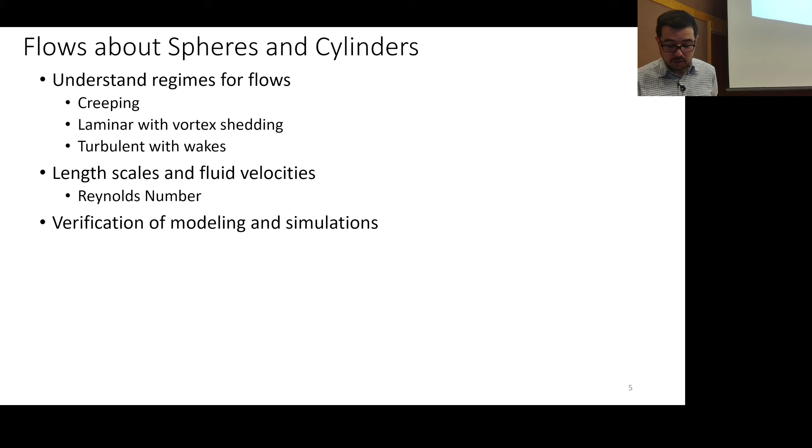We've talked about the drag coefficient before. If you've got some kind of 2D or 3D projection, you can think about either the frontal cross-sectional area that's being exposed, or you can think of the wetted area, as with an airfoil, so span times length, or a surfboard, where you've got this big area in contact with the water - that's your wetted area. You've got to be careful when you calculate the drag force what the table you're looking at is essentially saying the area of interest might be.

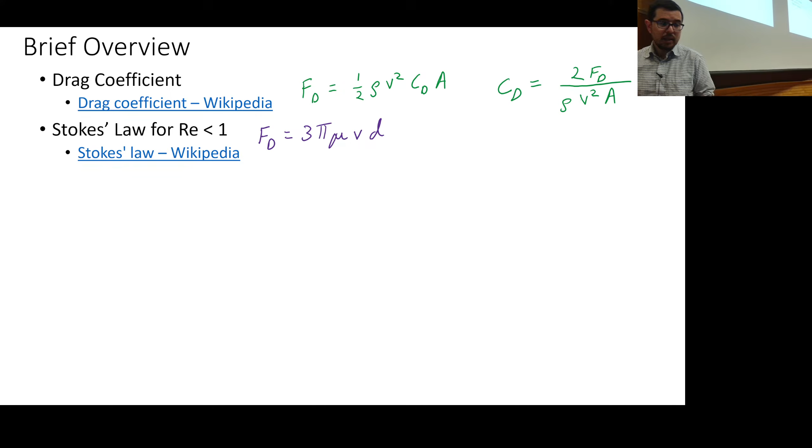We can rewrite CD as we see there, and for Stokes flow, for a Reynolds number much, much less than 1, the drag force is this analytical expression: this is the diameter, this is the velocity, the free stream velocity, the dynamic viscosity, then the coefficient at 3 pi. Now you can also look at graphs like this.

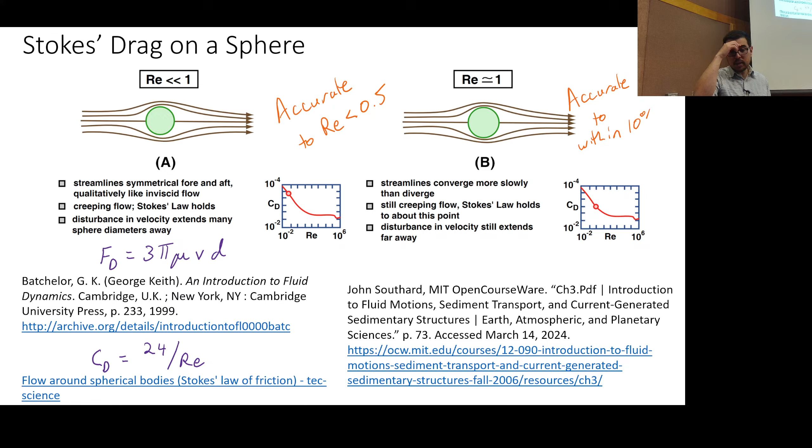As you get a little bit faster, as the Reynolds number increases, you can begin to see slight disagreement. The accuracy is maybe within 10% of the Stokes approximation, so you're starting to push the edges. It's still creeping flow, but we're getting closer to the onset of turbulence. That's what it means.

So I don't think I've had a chance to really tell you about what I did as a graduate student, but here you go. Whether you like it or not.

For a not too long period of time, a few years of my life, I got very interested in understanding how to get rid of bubbles from polymer solutions. Bubbles, some of them, many of them, are close to spheres.

So I was looking at relationships for how the bubbles would flow in molds. We were attempting to mold devices that had micro or nano features on them, and we wanted to mold them in a way that would not have bubbles.

So what are some typical ways to make sure that polymer parts do not have bubbles? You pick up your plastic plate or your toothbrush, right, and you're like, oh, that's a really nice piece of plastic, I'm glad it doesn't have any bubbles. How'd they do that?

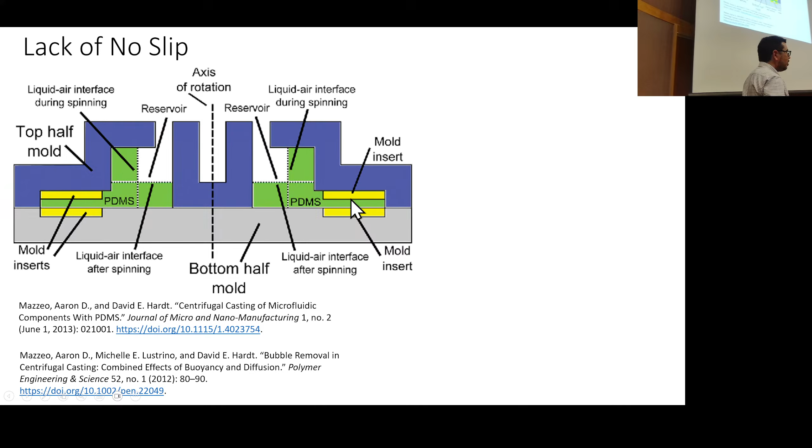So there's gravity theoretically pointing downward, and so the bubble would want to hit the ceiling, right? Now, if I start spinning, which way does my gravitational vector now start going?

It depends on which side you're on. The gravitational vector is going to start off like this, and then gradually, at least if I'm on this side, it's going to move more or less like that. So now, which way are the bubbles going to go? Left and right is hard here because I don't know which side of the board you're on, so which way do you think it's going to go?

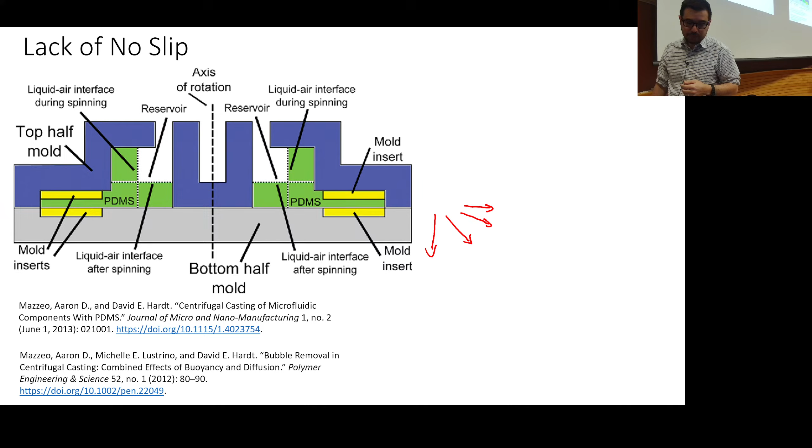So who says outward? Who says inward? Yeah, okay, inwards have it. So what happens is you've essentially got this gravitational field now acting radially outward, and the bubbles go against gravity, right? You've seen that. Now if I had lead pellets in there, they would go out, because buoyancy is working in the opposite direction. But because the bubbles have such low density relative to the liquid, they move inward.

So I spent time looking at simple things like, okay, what's the drag on the bubble? What's the buoyant force on the bubble? How fast is it going to move? As the gravitational field changes, going with omega squared r, pressure is omega squared r squared.

The gravity is less closer to the center. So are the bubbles going to go at a constant speed? No, they actually slow down as they get close to the middle. But the pressure is also less there, so the pressure means that the bubbles can expand. So it's actually kind of fun and interesting.

And so I created models to describe this. One of the things that's interesting though is that bubbles can travel more quickly than solids.

Why is this? Well, a couple weeks ago we were talking about how you have no slip, a meniscus between the ground and your foot, like you have the no-slip condition on the bottom of your foot and the no-slip condition on the ground. But anyway, what's actually happening at that air-liquid interface is it's actually slipping.

So the liquid can slip along, and there's this Hadamard-Rybczynski relationship. This looks exactly like what we just talked about when we said, hey, this slows down. But then there's this correction term, and what it says is you look at the viscosity of the fluid and the viscosity of the bubble material. As you can imagine, the viscosity of the fluid is much higher than the viscosity of the bubble material, so these terms become insignificant, these become pretty significant, and you get a 2/3 factor. So you actually cut down your drag by quite a bit, by like 33%.

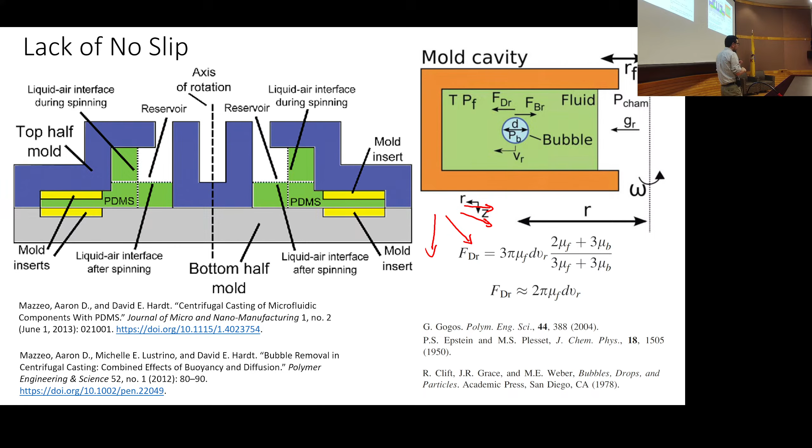Okay. Anyway, if you want, you can read about it. It's not that interesting. Well, it is interesting. I thought it's very important. Okay, I'm very biased. But anyway, so we did some things there, but I wanted to show you the experiment that we did, or part of one of the experiments.

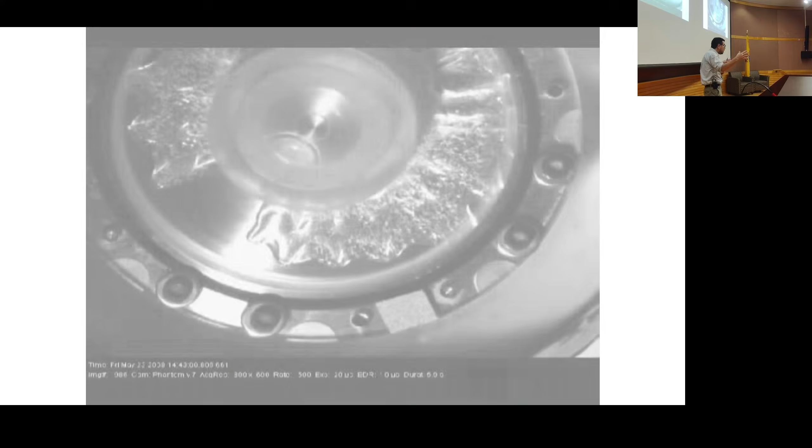So you see, this is a cylinder with a bunch of bubbles in liquid, and it's actually whipping out to the outskirts. And then this is 5 seconds later. You see there's still some specks in there, but a lot of bubbles are gone. And then you zoom in and look. These are the bubbles taking 1 shot per revolution, more or less. So we have a little bit of drag, because it's accelerating, right? So now it's reached steady state speed. So you see those bubbles are moving along. It was beautiful.

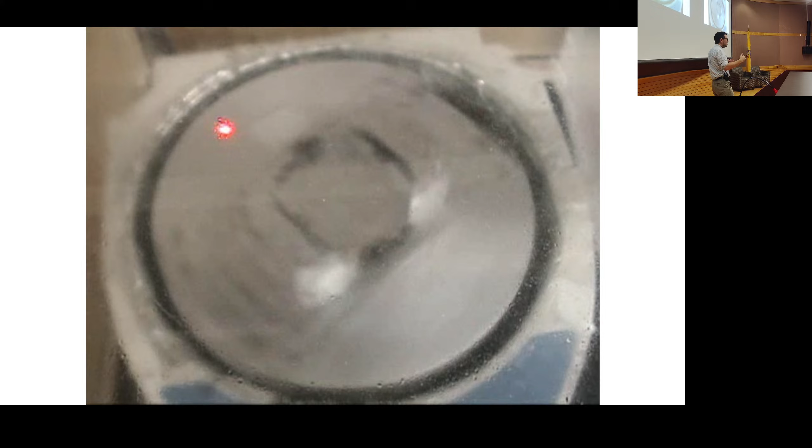One of the reasons why they let you graduate, right? You have to do something to graduate. Otherwise, you're just in graduate school forever. Okay, so yes, that is an application of Stokes' law. So now you say, oh, you asked us why are we studying this? I guess part of the reason is also I like bubbles.

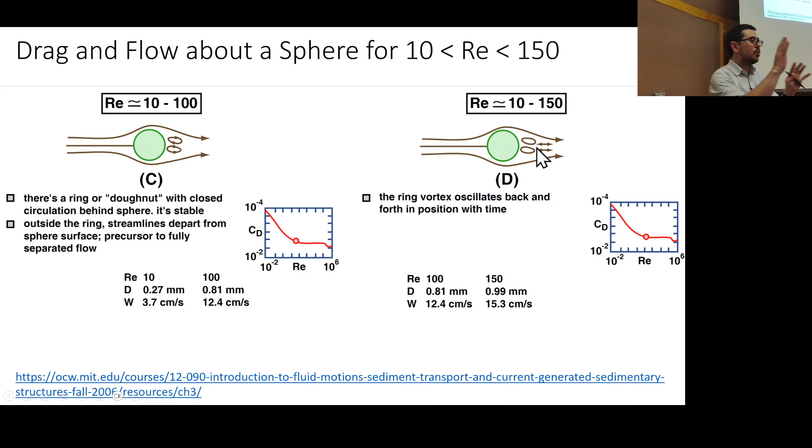All right. So now, outside of that regime of creeping flow, you start to get into the donut regime. Okay. So you actually start to shed these vortices, and you have these little closed circulations happening behind the sphere. And as you get a little bit further along, these little circulations can actually move back and forth. I've never seen this. I'm sure there are YouTube videos out there that have this behavior. I'm also pretty sure that it's very hard to replicate this because you've got to have everything just right. Okay.

And then once you get to thousands, you start to see the shedding of ring vortices. And then finally you get, or actually maybe not finally, you start to see a lot of wake and turbulence. And then you can get to a drop as well, and then another bit of turbulence.

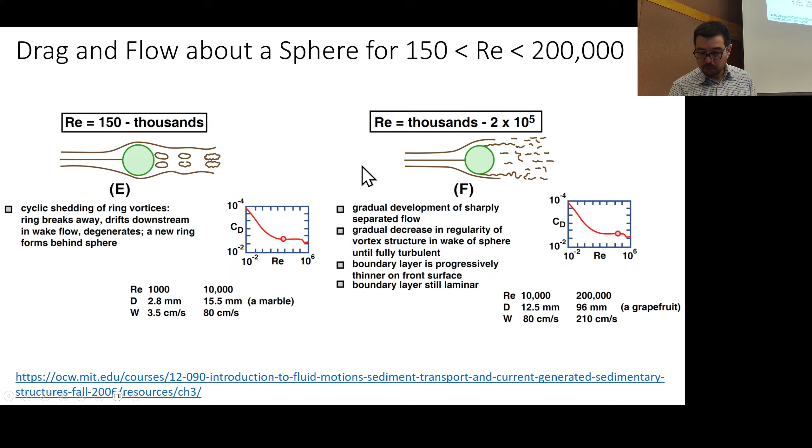You know, it's interesting that for these types of flows, people have used them when they're looking at how fish swim, right? Because they shed vortices. So people have looked at analogous systems with spheres, or cylinders actually, and tried to get the same type of vortices. And if you can have the same flow, and you can measure the force on the object that's inducing it, you can say that drag is like the thrust. Does that make any sense?

So imagine that you have a fish swimming along, and it sheds a certain set of vortices. You see a certain flow pattern. You can't calculate, I mean, you can say, hey fish, how much force do you feel, right? But what people have done is to say, hey, look, those vortex shedding patterns are very similar to what I see when I put cylinders in a flow. And I can measure the force on a cylinder that's suspended in a flow, and so I can approximate the thrust; that drag would be equal to the thrust. I digress.

I'm just stalling because I really don't want to do the simulation. Alright? But we're going to get it.

It'll be fun. So, one other dimensionless number that people will reference is called the Strouhal number. And there's different, I can't remember the other parameter that people discuss, but this Strouhal number has the frequency, has the length, and has velocity, right? So this is the diameter of the sphere for the L and the flow velocity.

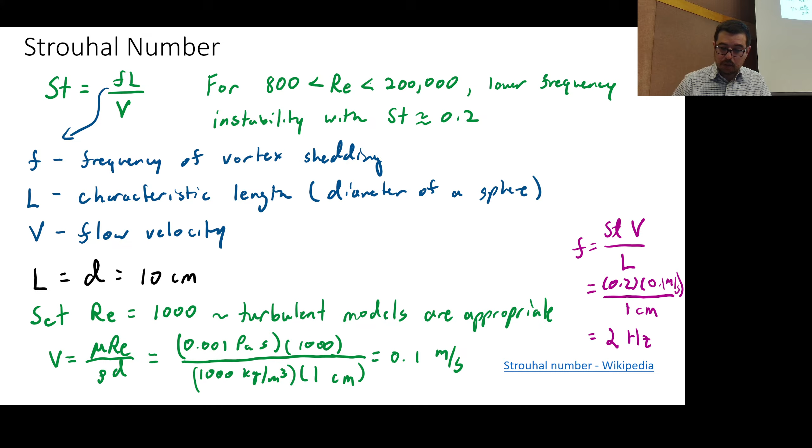And then you have a whole host of different vortex shedding patterns. They're kind of fun, some of these names. You have the omega-shaped vortex, the periodic vortex shape, the non-periodic vortex shape, the vortex loop, the fixed vortex ring. So again, to get all of these different regimes is an extremely tedious and difficult process.

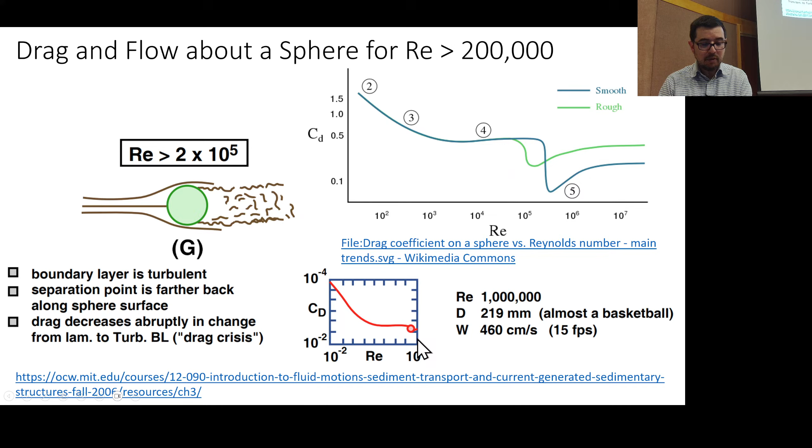And then after we're going critical, okay? I guess you could say this diameter is like a basketball, and this is 15 feet per second. So we hit this drag crisis, and we see a drop in the drag force, like we see here, and then I see it come back up.

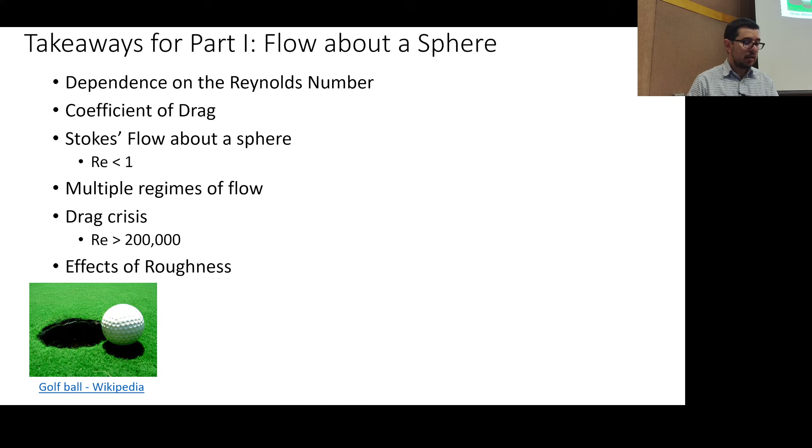Okay. So here's some takeaways. Dependence on the Reynolds number, yes. We can use a coefficient of drag, so we don't have to run any simulations, if you can avoid them, please. There are multiple regimes of flow, and you have a drag crisis. And you can also see that there's an effect due to roughness and spinning also. So some of you will attempt to look at things with a Magnus effect.

So normally, when you have a ball that is not rotating, it's a symmetric object, just like a symmetric airfoil, like a NACA 0012 or something. We will do asymmetric; 2412 is one that's asymmetric. But if you have a symmetric one, you expect to have drag but no lift, unless, of course, you pitch, you change the angle of attack. So the same thing is true with a ball. You should have only drag.

And drag is a force acting opposite to the flow, or opposite to the travel of the object, and it's essentially completely aligned with the free stream velocity, moving in the opposite direction. It's parallel. But if you start spinning the object, the ball, the cylinder, whatever it might be, then you can induce an additional difference in the speed of the fluid about that object, and you can induce lift.

So golf balls are one case where they're hit and spin quite a bit, and that means they don't follow a straight parabolic arc of travel. I don't golf, but they go up, and then they go over, and they go farther. Magnus effect. So some of you will work on that. You can prescribe a surface velocity. Just like no slip, you can prescribe a velocity of the fluid at that boundary around an object, and you can use that to approximate the Magnus effect.

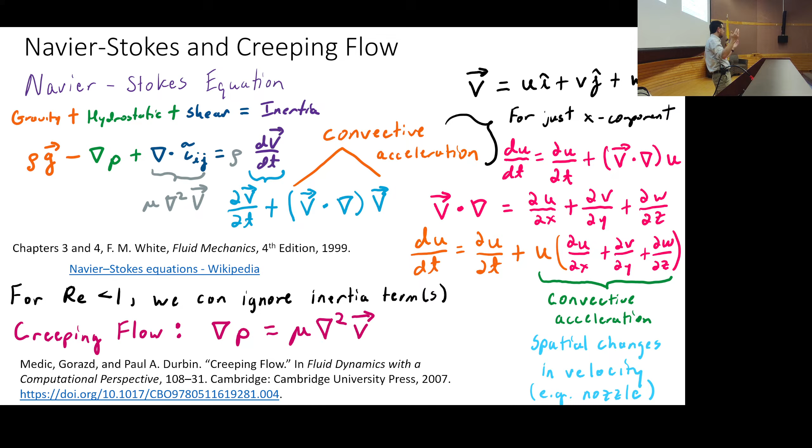And you can calculate this out. You can say, I believe I will have changed my speed over this period of time with this density or this size object. Is that a significant amount of force in my system? And if it's not, then you can forget about it. So one thing that I don't know how to do in Ansys, but I do know how to do in COMSOL, is run the simulation for creeping flow, because COMSOL has an option that ignores this term.

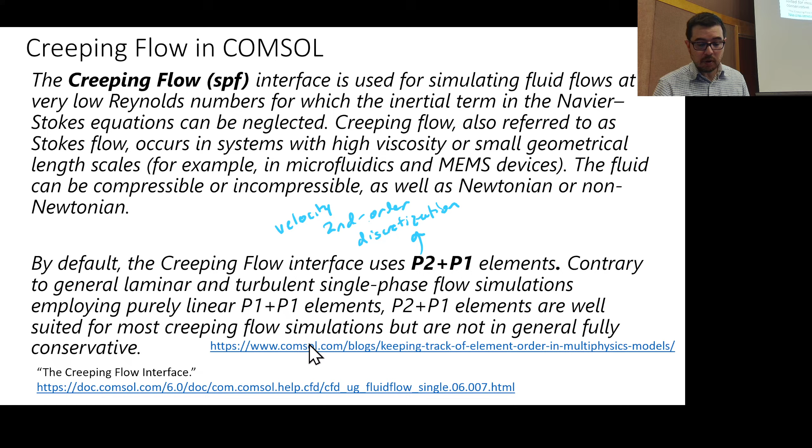Okay? So for Reynolds number much less than 1, we can ignore the inertia terms. And so the creeping flow, if we ignore gravity, is just going to be the gradient of pressure is equal to mu times the Laplacian of the velocity. Okay, so this is essentially the PDE that COMSOL will solve. You can look at details of how this works, but it's using second order elements for velocity, and first order elements for the pressure.

Remember, what technique does COMSOL use for fluid dynamics? Finite element. What technique does Fluent use for fluid dynamics? Finite volume. Right. So we're also looking at essentially two different approaches numerically that the computer is going to use to solve the problem. So here's our setup, and I'm going to open up COMSOL.

What we're going to attempt to do is have an axisymmetric setup with a sphere. This is the axis of symmetry right here. We're going to bring in fluid like this, and we'll have an outlet down here, and we'll say it has a radius of 50 microns, and we'll have some distance here. The drag force, if you calculate this all out using that 3 pi mu v formula, should come out to be about 0.9 nanonewtons. So let's see how it goes.

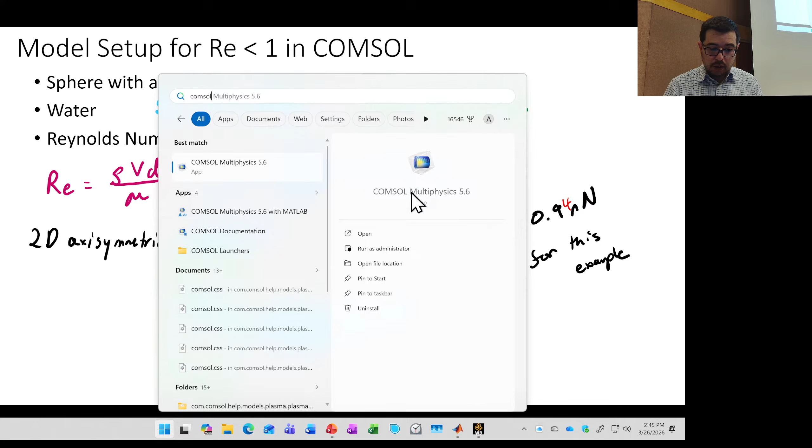The viscosity of the water is going to be 0.001 Pascal second, or 1 millipascal second. Okay, so I opened up COMSOL, and I opened up... So some aspects of COMSOL, at least the user interface, are very similar to what you've been seeing with Ansys. And now you can say, well, you have been introduced to it at least.

So we're going to say we're doing a 2D axisymmetric problem. If you come over here, it has recently used because I recently tried this morning to make sure it still worked. We're going to use single phase flow. So this is a case where we have completely rigid boundaries. We're not modeling solid, and there's only one phase of material, which is the water. So we'll go ahead and add it, and it gives us these parameters.

So COMSOL at least helps you feel that you're more connected to the partial differential equations. In fact, you can just plug in the partial differential equations that you want in the weak form, in the general form, and different formats that they have. I can show you that, because if you go down here, there's this whole math section. There's a PDE interface, so you can have the general form, or what's called a coefficient form for PDE. So different coefficients correspond to different parts of standard PDEs. But we're not going to do that right now.

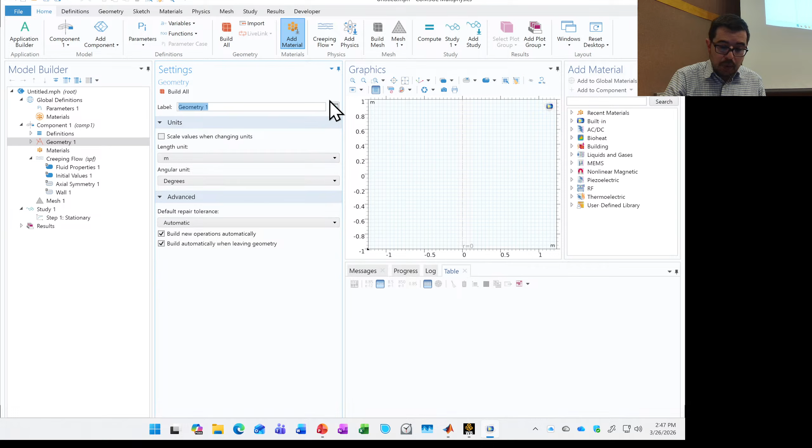So now we're going to go to the study. We're going to use stationary. That's the same thing as steady state, and we'll go ahead and click done. So now, this is interesting, there, now it's showing. It just made me feel better to see the bottom. Okay, so here we're going to change our units to micrometers, like that.

And we'll go ahead and put in a circle. Or maybe we'll put in the box first. I don't know, we'll see. We'll just put in a circle. And we're going to say that the radius is 50 micrometers, and we're going to build it. Okay, so there's a circle. And then we're going to build a rectangle, and we'll say that this is going to have a width of 250 microns, and the height will be like 1,000, so like 1 millimeter.

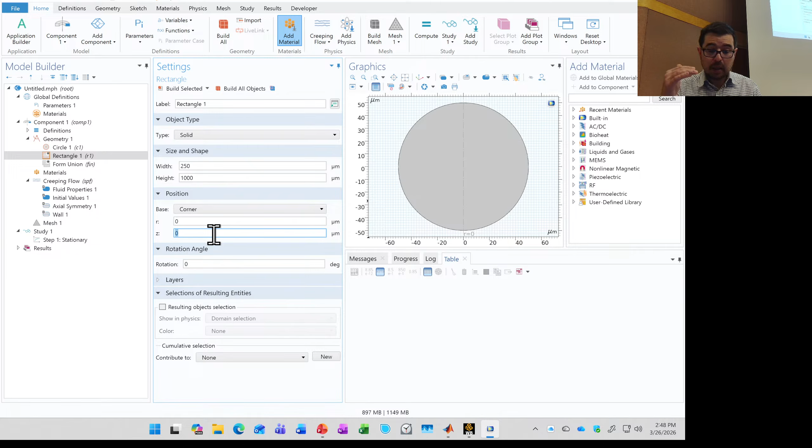And then we will put it at like minus 700. I have to see, maybe this is going to be wrong. Okay, this looks like it might be wrong. Hold on. No, that's actually not that bad. Okay, so that's pretty good.

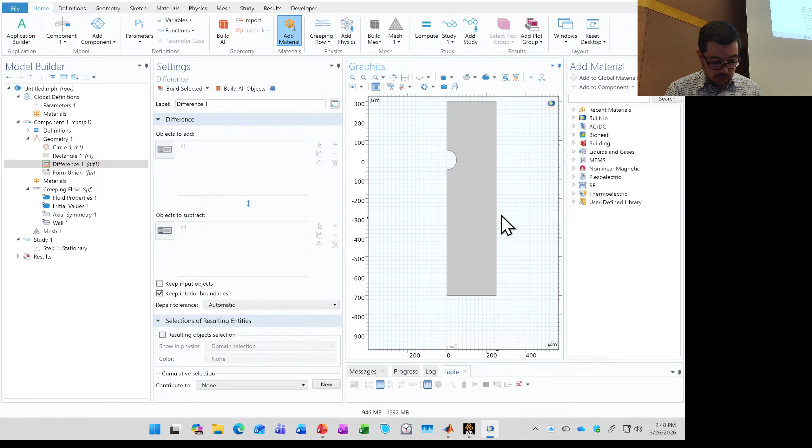And then what we do is we perform a Boolean operation. So we're going to do a difference. And we're going to say, okay, I want this domain, but I want to take out that little domain. And so I build all the objects, and I'm left with something that looks, okay, good. Even though I just don't remember which mouse button does which. When you do Ansys, they're different. Okay, so that's the geometry.

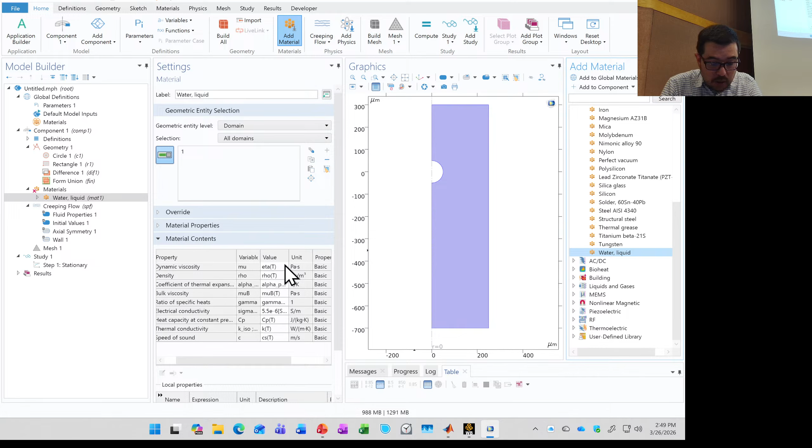For the material, we'll come over here, and it says entity needs a material. So we'll use the built-in one for water, liquid here. So now you can see it's only using dynamic viscosity and density, and it doesn't tell us what the values are, okay? Because it's a function of temperature. But it should be 0.001 Pascal seconds, at least at regular temperature, and it should be 1,000 kilograms per meter cubed for the density. Okay, now let's see here.

The axis of symmetry in COMSOL is the vertical one, as opposed to the horizontal one in Ansys. And this wall, you see that it's being applied to this section, and this section. So this wall is going to have a no slip condition on it right here, but out here that's not what we want, and here was not what we want, and here's not what we want.

What's happening here? This is essentially on an axis of symmetry. You have a mirrored boundary condition. Mirrored boundary condition meaning, hey, a fluid particle just really close on one side is going to be doing the same thing as the fluid particle on the other side, okay? And that is the same thing as saying no here. Right? So, but it's an axis of symmetry, so we don't have to worry about it.

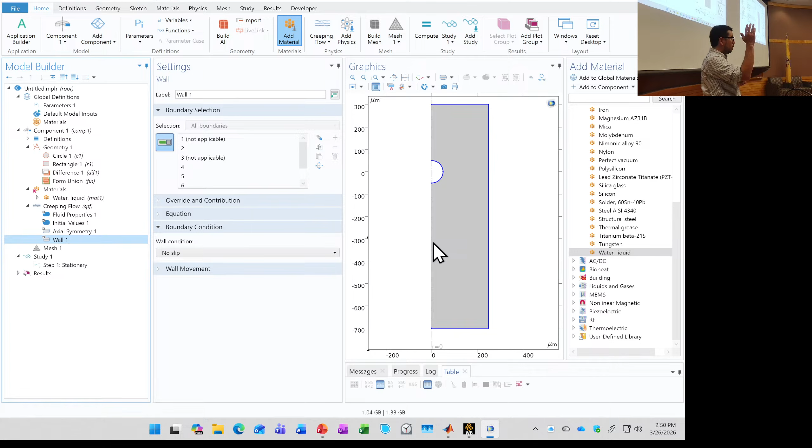So what are we going to do? We're going to come over here. You can right click or you can go up to the top. We're going to add an inlet at the top. Right, so this is all looking kind of familiar-ish, right? So that's an inlet. We'll prescribe a normal inflow velocity. Okay, so this is supposed to be 1 millimeter per second. Okay, so it has the units already there. So I just got to put in 0.001.

And then we will define an outlet, which will be similar to what we do in the Ansys world. Okay, and you'll see that, oh, look, it's very similar. 0 Pascal for the pressure. Okay, and then out here, I'm just checking to make sure that we're okay with things. We have this with the no slip condition, symmetry, outlet, inlet. Okay, we gotta put a no shear condition on that outer one. So where did I lose it?

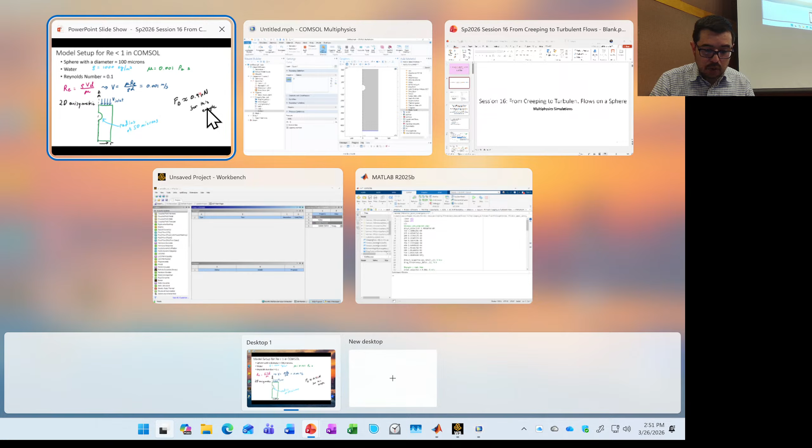Okay, so here for this flow, I can put in open boundary if I want, or symmetry would probably do the same. Actually, I don't remember which one I used. Let's go with symmetry, and if it doesn't work, it's my fault. Okay, now mesh. I'm just going to go ahead and use the default. That's not great. It's not horrible, but it's not bad.

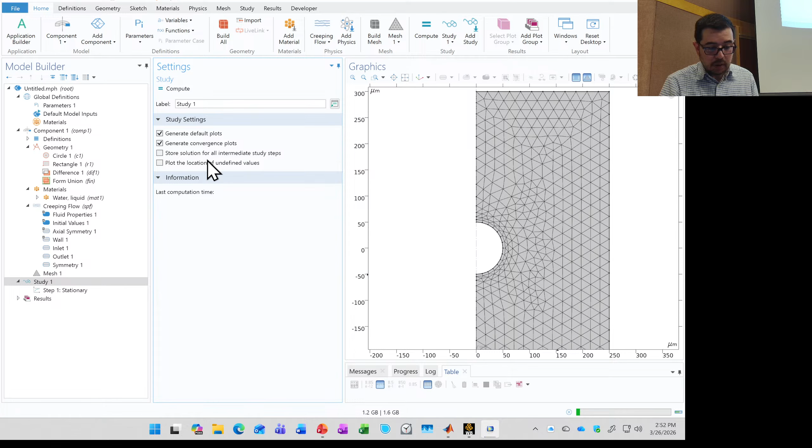Okay, and we can close this, and we can zoom in a little bit. You can get a good idea of what's going on here. Ooh, too much. Yeah. Okay, like this. All right. It's a stationary. Okay, so this seems to make some sense, although I'm a little. Let's see. I guess this flow is a little interesting here. I wonder. Let's just see if I use open boundary instead. If I get rid of this one, and I use open boundary, I wonder if it changes things.

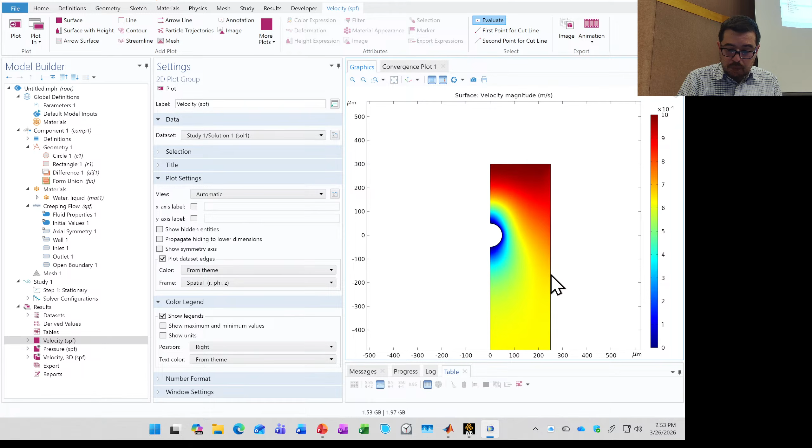And then we come over here. Oh, I had to select it. Great. And mesh is still all there. We'll go ahead and run. Okay, so that does change things a little bit. What you see there is that the fluid can just kind of come out. Let's see what the drag coefficient ends up being. Open boundary is not horrible, but I think I do want to just leave it with symmetry instead.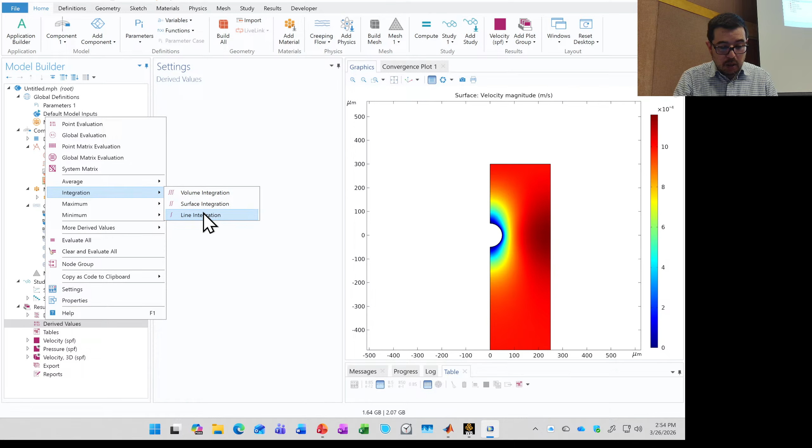Okay. And we're good. So we come over here and we run. All right, so we've run this simulation. Now, what we need to do is come in here and look for a derived value. It's a little trickier to do the drag calculation, but not horrible. So we're going to do line integration, and we're going to do it about this surface, or this curve right in there. You see that? Because that's how we would measure the drag force.

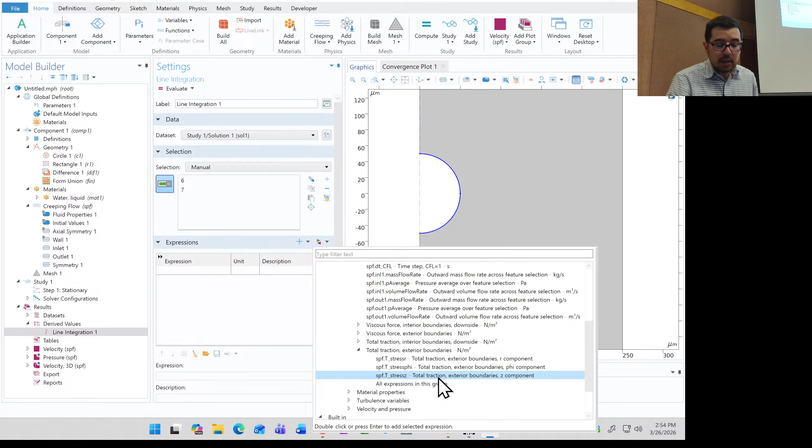And then we put in an expression. What do we want? You had to play around a little bit here. We are going to go under creeping flow. We're going to look under auxiliary variables, and then we're going to come down and look at traction, and we're going to look at traction in the Z. So Z is the vertical direction, and that's what we were looking for the drag force. So we put this in there, and then we just say evaluate. Okay. And what do we get?

This is the moment where I'm a little nervous. Okay, so we got 1.4 times 10 to the minus 9. That seems a little high to me. Why? Because it's not completely off. Right?

Okay, but I'm looking for 0.9. So, you know, it's not horrible, but it's not great. So what happens if we do a couple things here? Let's come back, and let's say instead of using symmetry, just want to make sure I use the right one. Yeah, this 0.001 meters per second.

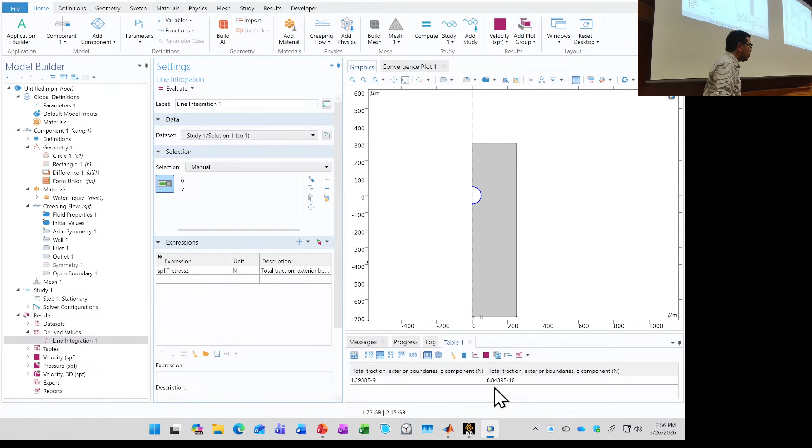If I disable this one, and then I add the open boundary, and put this here instead, and then I calculate it. Okay, and then I look at my line integral, and I evaluate it. Okay, I like this one a little bit better. Okay, so this is 0.89 times 10 to the minus 9. Okay, so that one's a little bit closer.

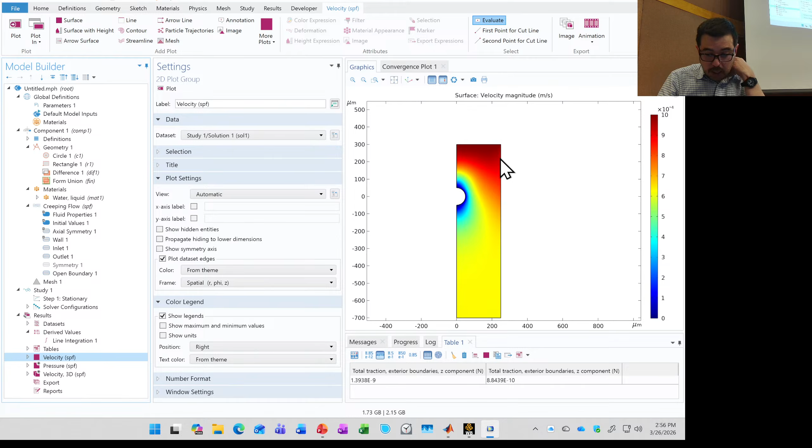We're still not quite there, right? We're still not matching the theory. So what can I do? I could do a whole kind of convergence study. I could increase the mesh, right? I could increase the number of mesh elements, right? And I can also look at increasing the height, okay, the width of this.

So for example, in this situation, I can come back all the way to the geometry, and I can change my rectangle, and I say, hey, I want to know if I make it 350 there instead. I build all the objects, and then I run my study. Look how fast that was. Right? And then I come over here, I do evaluate. Okay. Now, okay, I'm getting another value, right?

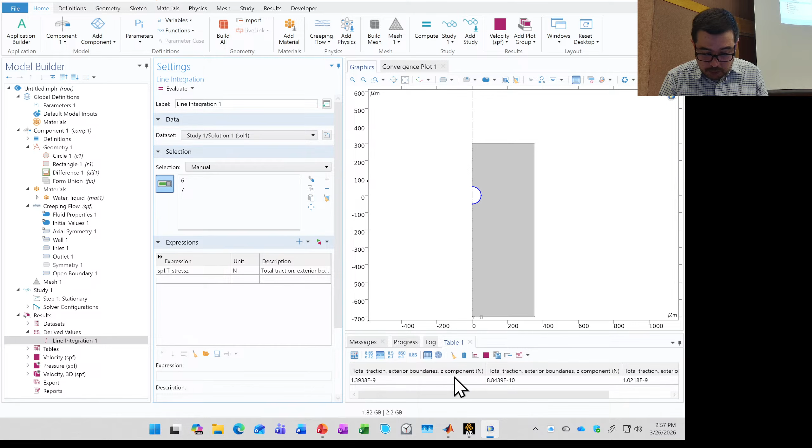So let me just clear this all. I want to be clear. Before I got like 0.88, that's the one that I got. But let me just clear this whole thing, and I'm going to do an evaluation. Okay, so now I'm on the other side, right? I'm at one. That's close. So 1 times 10 to the minus 9. Right? So you see, this is not going to necessarily get me exactly the value I want, okay, but it's getting me close, and that's to be expected with multiphysics simulations.

If I come over here, right now I have normal element size, I could do like extra fine, okay, and see what kind of effect that has. So once again, I can run it, okay, and then I can look at the line integral, okay, and I think I got 1.04. Let me see. I can't remember which is which. Okay, 1.04. All right. So wait, that didn't help me get where I wanted to be.

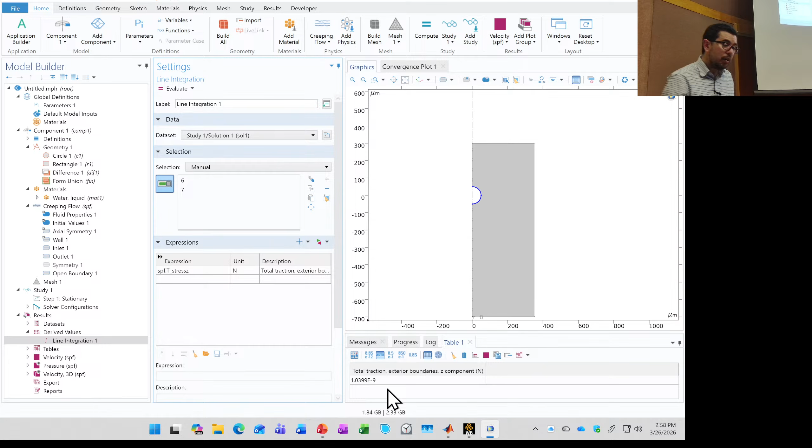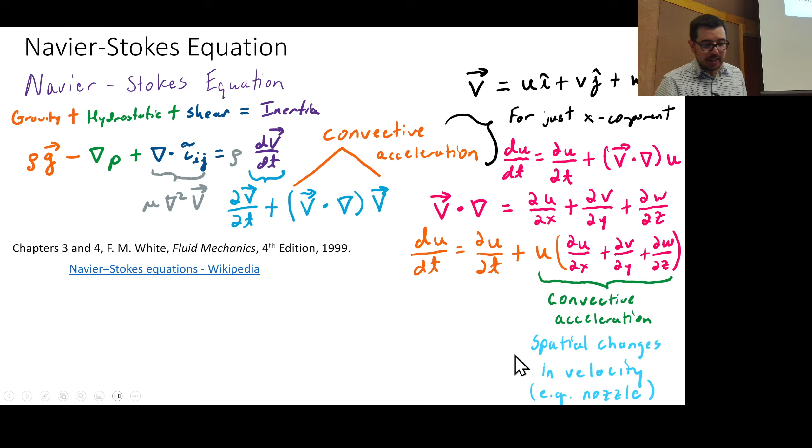Right. But once again, I might converge on a value that is like 1.03 or 1.02. Right. It's on the right order of magnitude for what the analytical solution is. Good. Okay. So that's COMSOL. And you can see that arguably that's a little bit faster in some respects than what we're about to do with Ansys. Okay, so with Ansys, we're going to do the same problem.

So spoiler alert, right? Before, what I changed was the width of the domain, but here it's going to be the height of the domain. I also affect, as you just saw, the drag forces I measure. And I am actually getting kind of close to the values that I just showed, that 1.04, 1.03, in Ansys. We won't be able to run all these simulations, all right? We'll be able to run one simulation, and then for your homework, you'll be able to use the parameterized model to change this height.

Why would you do this? Because you want to show convergence. Your assignment, not this checkpoint, right? This checkpoint is just a demo simulation. But your next checkpoint is going to be showing some type of convergence. So for that, you're going to want to change the domain, change the time step, do something that gives us an idea that we can trust the solution that we have at hand. Okay.

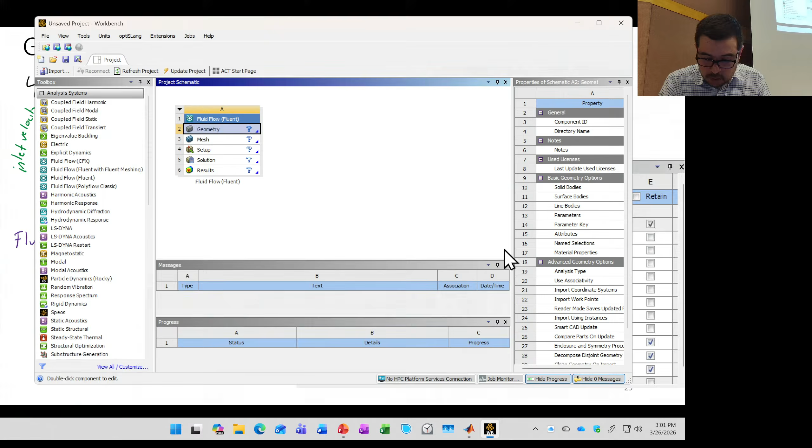All right, I bring in Fluent, and we are going to be using a 2D geometry, so the analysis type will be 2D. The plus side is that the font is a lot bigger than it normally is. The downside is I'm not quite sure why it's doing that, and it's kind of messed up things a little bit. Okay, so we're going to use SpaceClaim.

While this is coming up, I'll review: we're going to have this 100 micron. When we say 100 micron, usually people mean diameter, so that means it's a 50 micron radius, a circle, but it's really a sphere. We're going to have a total length of 1,000 microns, offset from the inlet 200 microns. The height of this is going to be 200 microns. It's not shown here, but it's going to be 200 microns as well, but it's going to be something we can vary. The initial starting value will be 200. Let's see how SpaceClaim is doing.

SpaceClaim, all right good, there you are SpaceClaim. So now we click here on the Z, and we click that we want to do this on the XY plane, and we come over here. Before we get into actually placing a rectangle and circle, we come over to the units, and we're going to use micrometers for this one.

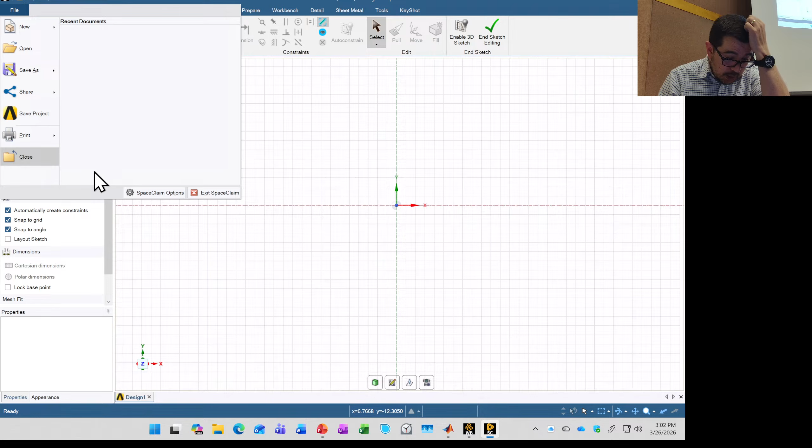I'll go ahead and put a circle right here, and I'll put 50, enter. Okay, so that has made a nice big circle here. And then for our rectangle, we can come up over here, and we said it would be 1,000 horizontal, and we'll start with it being 200 in this direction.

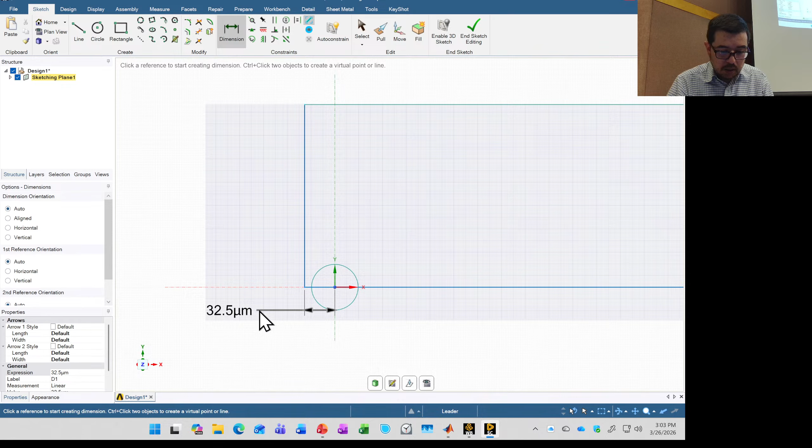We'll come over here and click on the dimension, so we're going to put this inlet about 200, double click on it, 200 micrometers that way. I'm going to control—make sure this is still 800 this way, so I'll do another dimension. It didn't keep it, so I'll double click, and we'll put 800 this way. And I'll say this is going to be 200—it's already there, so I'll leave it like that.

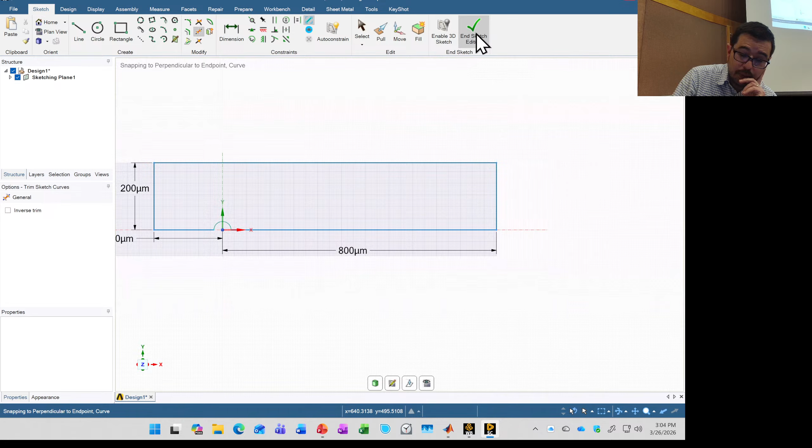But we've got to do a little trimming. You can come over to this trim tool, trim away, or hit T, and you're going to trim away there, and trim away there. So now we're just left with the domain where the fluid's going to be going, and we're going to have a no-slip condition on that. You can come over here and hit End Sketch Editing, and at this point you've got one surface, and that's nice—this is a little bit confusing.

So what we want to do is parameterize the height of this domain, like the width of the domain in COMSOL. To do that, you click on Move, you click on this top, you click on this green—this is all left click—you left click on this little dimension ruler thing, then you click on this base over here, and then you click on this P. Now you've parameterized it. Okay, fun.

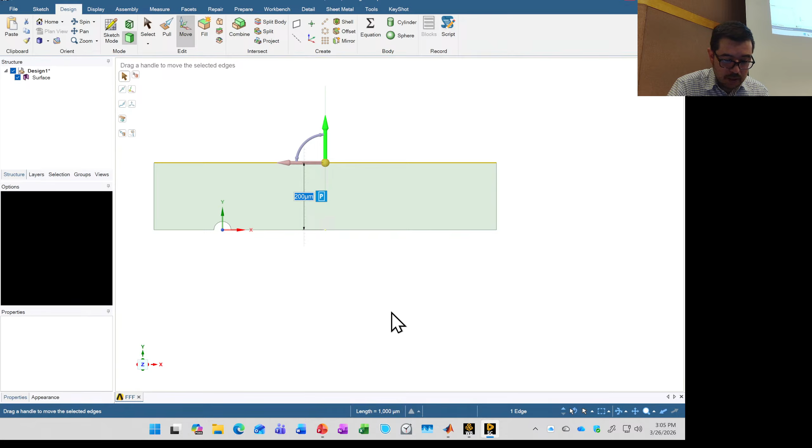When I get my act together, we might start using Discovery instead of SpaceClaim. For now, SpaceClaim it is. All right, so we're going to close this, and we should be good with a parameter that will appear in the workbench. Woohoo! If you double click on this, look, there's our DP0, 200 microns—we're in business. Close that. Let's go ahead and get ready for some fun in the meshing application.

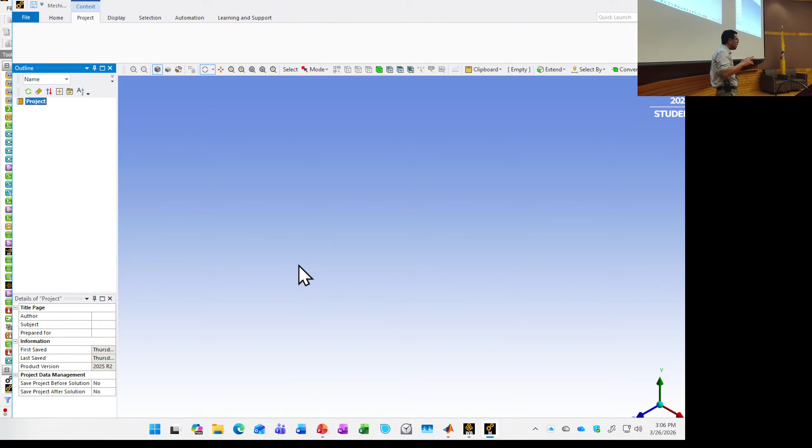Okay, so here we're going to define the inlet, outlet, no-slip condition, axis of symmetry, all right? And there are some, for Fluent, there are three kind of reserved names. You already know about inlet and outlet. The third reserved name is axis—so if you name one axis, it knows that's going to be your axis of symmetry. So we're just waiting very patiently.

Uh-oh, maybe I wasn't patient. Okay, great, it looks like it's here.

One thing I suggest you do is check the units, mine is now set for micrometers, but the first time you do this it's probably not going to be. So you come over here and set that, then go to geometry to check that you only have one surface.

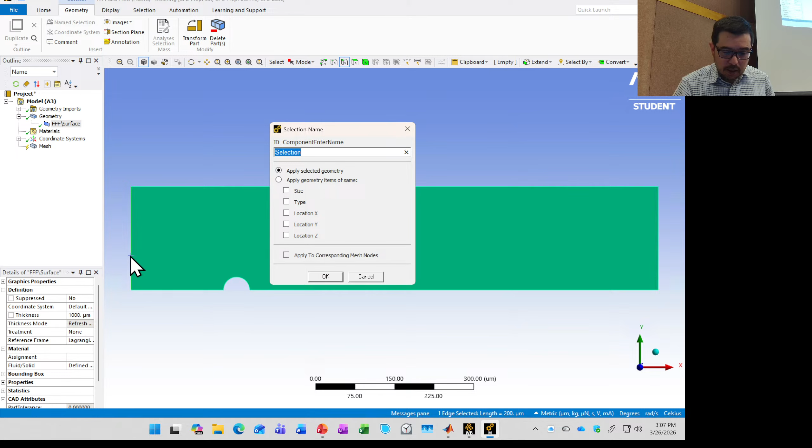That's good. Now we're going to go ahead and name some reserved or special spots. I clicked on that left one, then hit N, this is the selection name, so I'm going to type inlet, enter. I'm going to do this, and then control-click to select another.

What's going on? Uh-oh, that's not good. Why is it doing that?

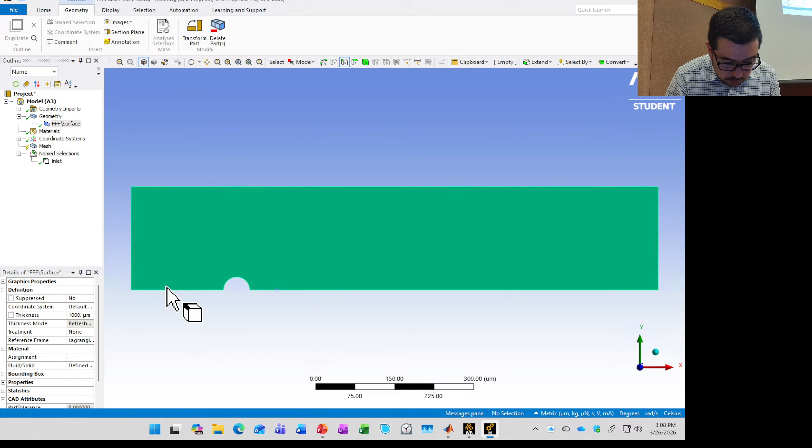Okay, so inlet is fine. Now it's fine, I don't know why it wasn't working. Okay, I got them both selected. Hit N, this is axis. Okay, so now axis, boom, that's good.

It's red. Okay, this is going to be the outlet, N, outlet. We can call this, if we want, the outer mirror, and we can call this one the inner edge, like that.

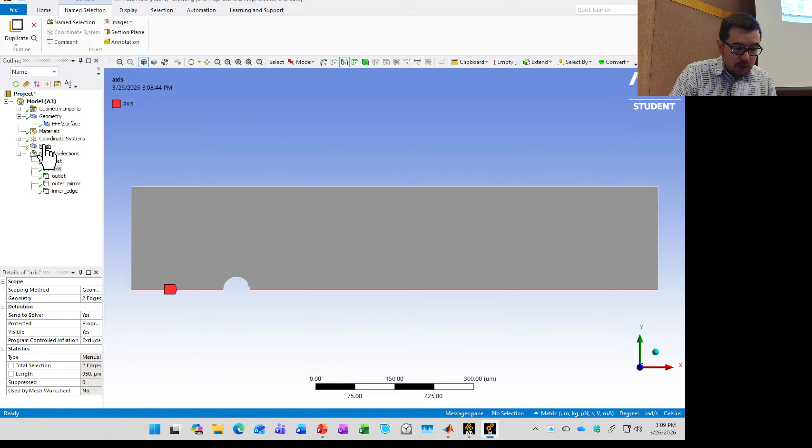It's time to do some meshing. If we do meshing like it is and generate it, it's going to look a little lame, not super cool. So we're going to do a few things.

One is we're going to come in here and change the size of the mesh. The default size is too large, so we're going to use 5 microns. And then the other thing we're going to do...

Oops, I didn't want to do that last. Oh, I really didn't want to do that either.

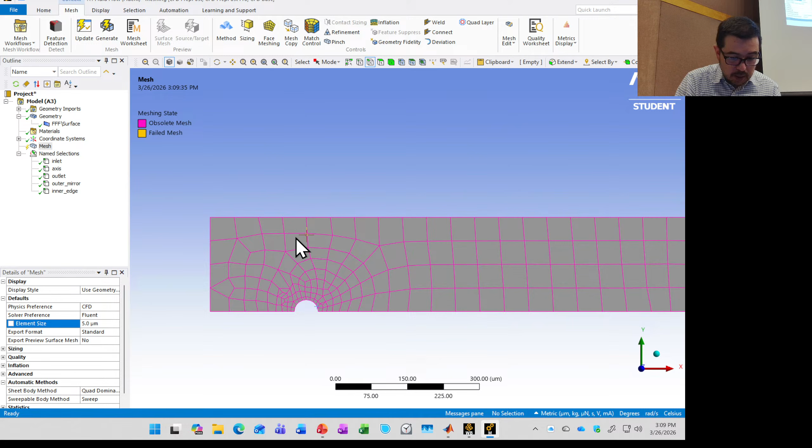Okay, the other thing we're going to do is change the mesh to use triangular. So we do selection on this surface and hit apply, and then we do a triangle mesh like this, so that means this will be triangular.

So we look at it, if we generate it for fun. Okay, we now see that our mesh is progressing nicely, it's starting to look like it could capture interesting behavior.

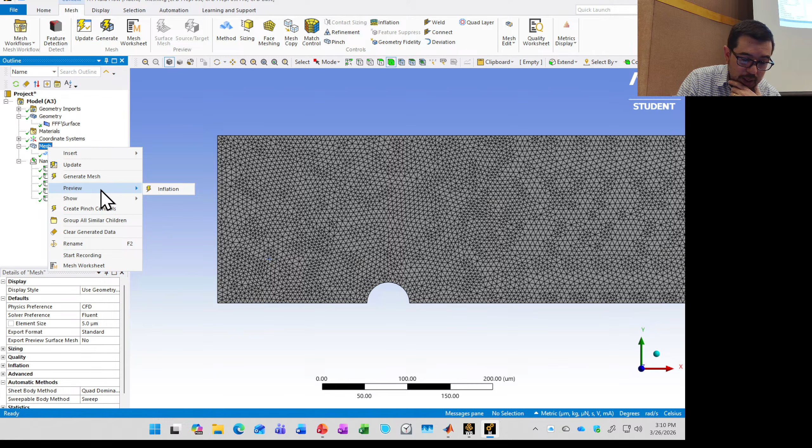And then we're going to inflate and break this into different regions around this inner circle. So we're going to go ahead and insert a sizing, and I can do it on the named selection if we want, on the inner edge.

And for the sizing we can put in something like 1, so that's going to be really small. So now what you see, if you zoom in, is that you've got this edge, this curve, broken into lots of bits of components.

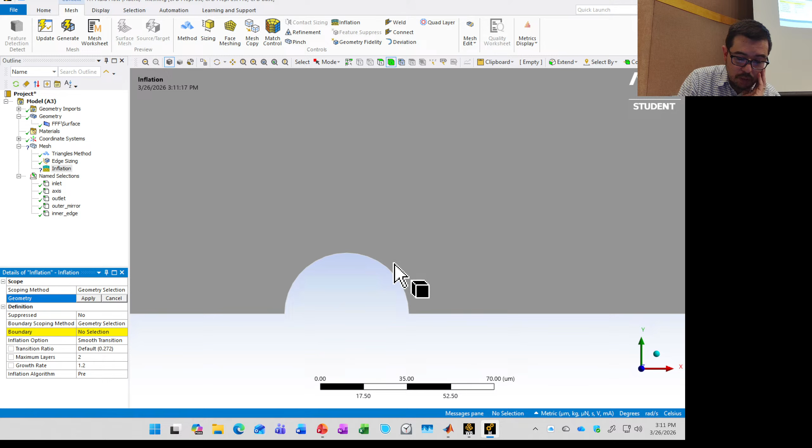We're going to go further and insert what's called an inflation. This is going to essentially help us capture the behavior at the interface. So we're going to use the geometry of the total of all the face, and then again our named selection, which is the inner edge.

And then we're going to do 10 layers, and we will decrease our growth rate to 1.1. This will make each layer closer to it, because it's growing as it stacks them on top of each other. Now if everything worked correctly, you see there's no layered mesh here.

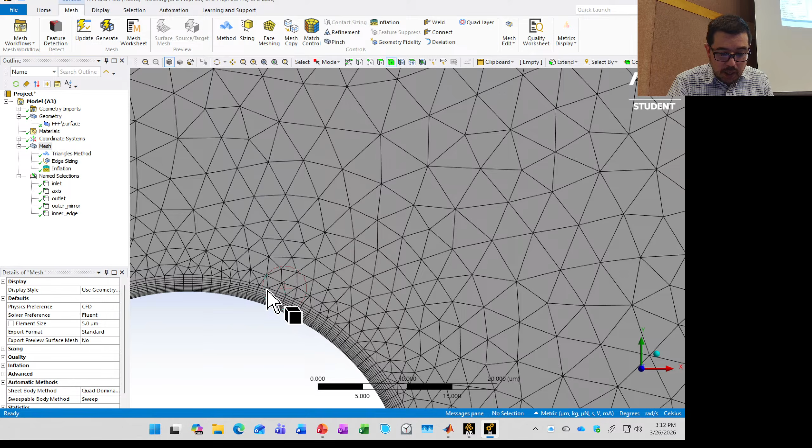If we generate it, now you see that you have these nice layers to capture the behavior at this boundary. This is looking pretty good.

We're going to go ahead and hit update, because this is faster than hitting close and updating later. So you hit update, and it says it was successfully translated to Fluent, or to the workbench. Now we hit the close on the upper right.

Okay, good, now we're going to go into Fluent. So we double click on the setup.

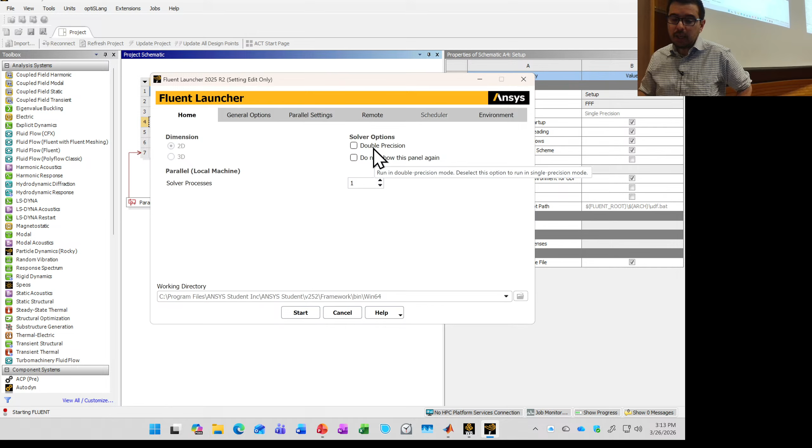In this case, before we were just using single precision, and some of our residuals were good at like 0.003. We're now going to use double precision, and we were only using one processor, now we're going to use up to 4. We're going to use a little bit more resources than we have in the past. And we hit start.

We're getting close. It's a little more detailed than what we did in COMSOL, but also there seem to be a few more steps. Unlike with COMSOL, where everything was in one software interface, this is our 4th interface that we're using. So it's bringing everything in, hopefully, like we like.

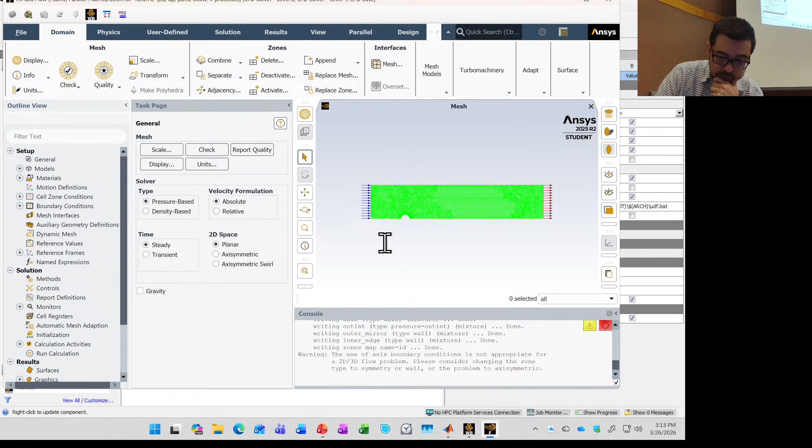And this is the general tab that comes available. You see that we have the inlet and we have the outlet, so this is good. We are going to go ahead and look at the axisymmetric result.

The model for now, we're going to do laminar, so I'm going to change it from SST, this turbulent model. I'm going to right click and then select the laminar model like that. Okay, and I can minimize this a little bit.

For the materials, we're going to do this in water. That's what we were doing before, so we only have air, and we can right click and click new. We can use the Fluent database, go all the way down, and get water liquid, not water vapor. We can copy, close, and look up here. In the older versions it would automatically put in water liquid, but for whatever reason, this is an improvement where you have to select water liquid. We're going to change to create, and we're going to close.

So now what we should have is a water liquid there, which we can then assign to the fluid zone, or fluid surface, like so. We double click there over the left, and we hit water liquid. All right, we apply and close.

Okay, so far I'm feeling confident, but I do not know if this is going to work or not. Okay, so axis has been set up. That's the boundary condition. Inlet has been set up. Remember, we need to apply the 1 millimeter per second inlet velocity.

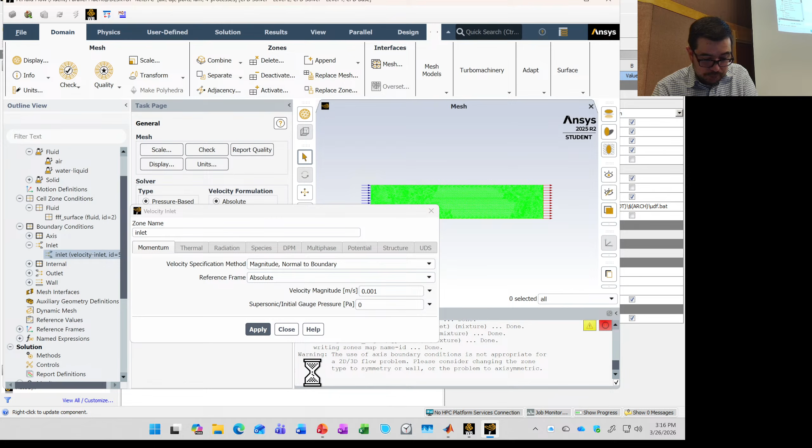And we can apply and we can close, okay, like this. Internally, we should be all set. The outlet should be all set. Okay, the walls. So in this case, the inner edge is really all set too. The inner edge is this one in the middle, okay, and that is where we have a no slip condition. So we can just close that. We don't have to do anything.

The top boundary condition, this outer mirror, is where we're going to want to have no shear. So I'm going to double click on that one, and in this case I'm going to be specifying the shear to be 0. So let's apply and close.

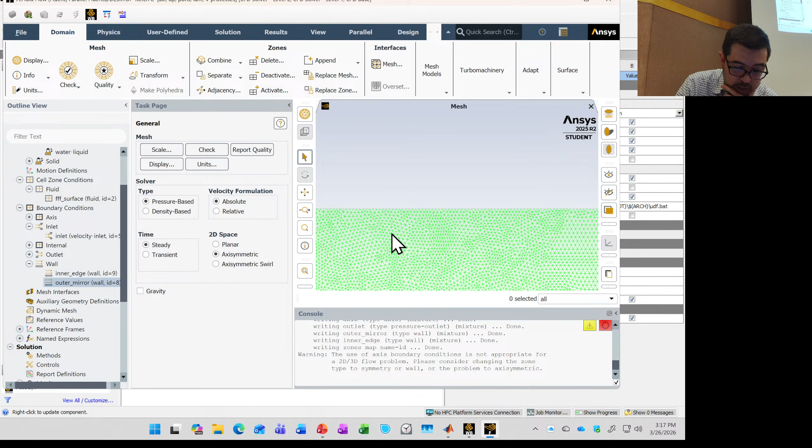All right, let's see. In this case, if we look at the residuals, we're going to leave them as the defaults, all right? But it's still only at 0.001, though sometimes it's necessary to reduce those further.

We should see now we have a named expression of inlet velocity. We will eventually have another one for the drag force, but we're going to run the simulation first. We come over here, we click on initialize and calculate.

Oh, blast. Okay, so I hope I didn't just mess things up. For the initialization, we're going to actually use standard instead of the hybrid, and I'm going to put this back down to 0, all these things to 0. So I'm going to hit reset. Oops. Okay, well, I'm going to say they're 0, because that's what I think has worked in the past. Okay, I can click initialize.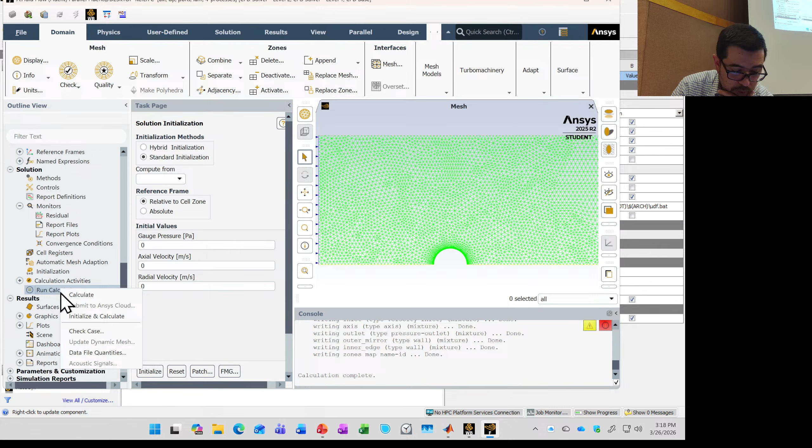Okay, has not been saved. That's not a problem. And then we will go ahead and we will, I guess, initialize and calculate, not a big deal. Okay, so we're going to put those in place. But even doing something like that, running the initialization or running the simulation before I have the correct initialization scheme set up, as you know, could force me to do the whole thing over again.

Good times. Let's see. We'll see how fortunate we get. All right, so now let's go ahead and let's take a look at the results.

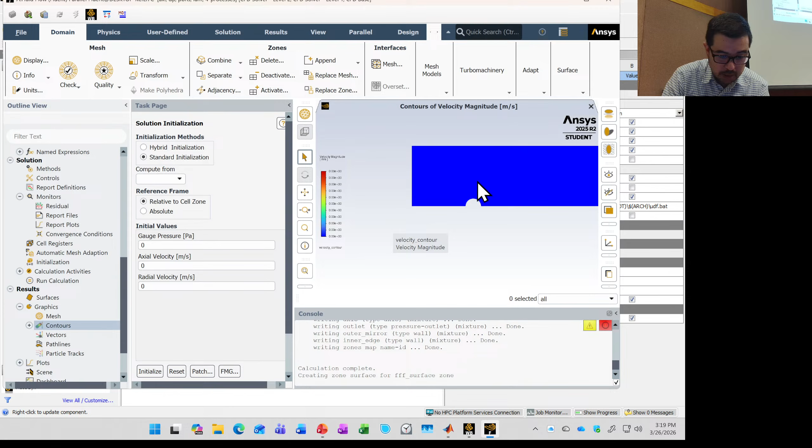So we're going to make a new contour, and we can look at the velocity profile. We can call it velocity contour, like that. Then we can do save display, close, and that is disturbing, as we were suggesting. Because what do we see there? Everything is 0. There's no velocity.

Just want to make sure that we actually have an inlet velocity. Should be there. Okay.

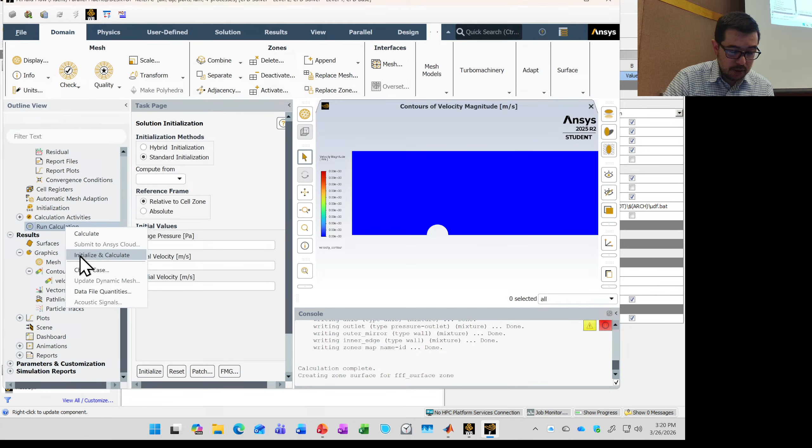Oh, I know why it's not working. Haha, good. I know why. Okay, what I need to do is I need to increase the number of iterations. Right now it has 0 iterations. So you can put in 100 or you can put 1,000. It's really only going to use a couple. Okay, so here we go. We'll calculate. And now it's running. Okay, there we go.

All right, everybody. Okay, so you got to remember to do that stuff, to make sure you change the...

Oh, it's time. Time flies when you're having fun. Okay, I gotta just finish this thing for you. Okay.

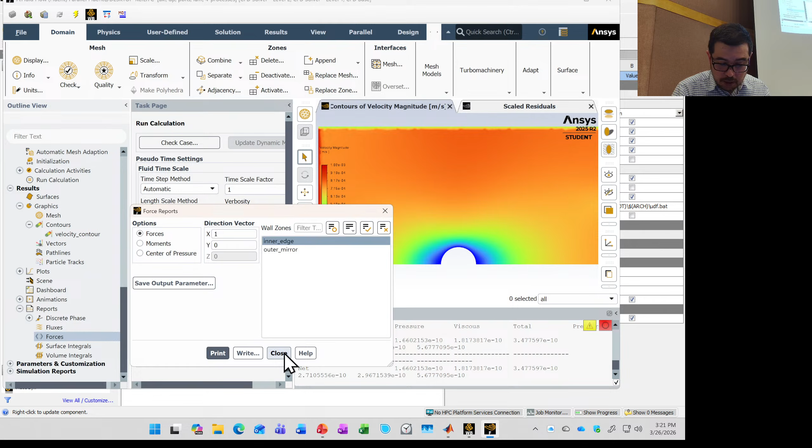Okay, so we want to know the force. That was the big thing, right? So here we're going to calculate the force right here, and we're going to save it as an output parameter, and we're going to call it drag force. And just like that. So now that's there, and we're going to print, and we're going to take a look. Okay, and what do we see? We see that the total...

Okay. So here it is. The drag force on the inner edge has come out to be 0.35 nanonewtons. That value is not what I would expect. It's not what you want to get either. It should be closer to 1 nanonewton, okay? But we're going to have to be a little bit lenient because Ansys is doing funny things.

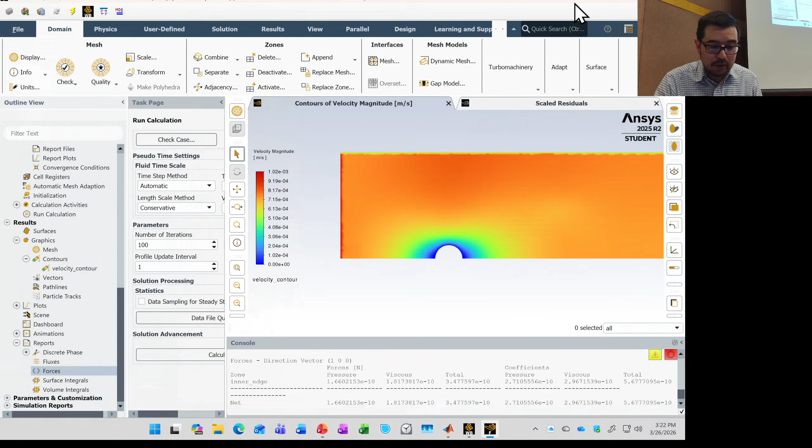If you come back out here, I just want to let you see a couple screenshots that will be helpful for you. We can close all this, and we're going to use this for future calculations. And you're going to be able to look at your design points. You click on the parameter set, and you're going to put in a whole bunch of different domain sizes, like 100, actually that's too small, so maybe like 125, maybe 175, 200, 250, 300, 350, okay?

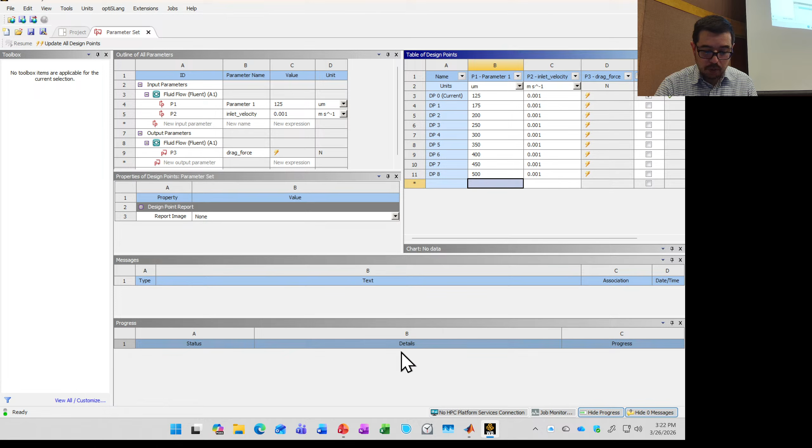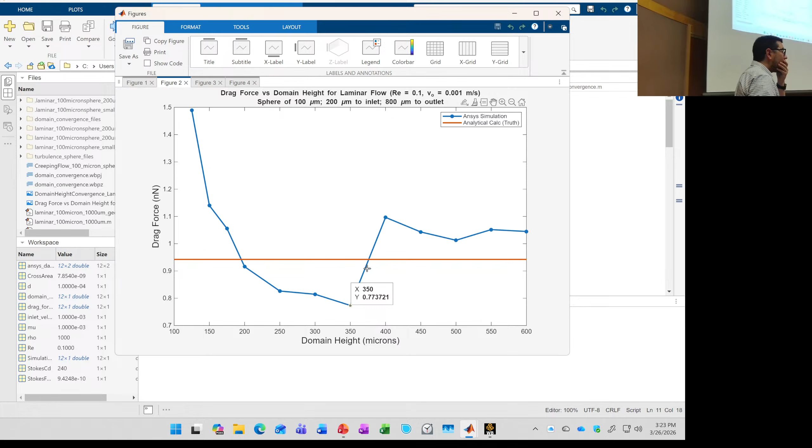You're going to put in a bunch of these sizes, and you're going to let it run, and you're going to end up looking for a plot. You would use something like this in MATLAB, and you're going to look for the calculation of the drag force as a function of the domain height. So where would you say this is converging? There's not really a right answer. There's not one answer. This is where you have to judge.

You may say here, which I say is wrong. So that's a wrong answer. You may say here. I say that's not the best answer because it's still doing stuff. But it does seem to stabilize out here. So either this point or this point or this point, one of those domain sizes would probably be appropriate. And this is how you would demonstrate your convergence for your demo simulation in your final project as well. And this is what you're going to do for the assignment.

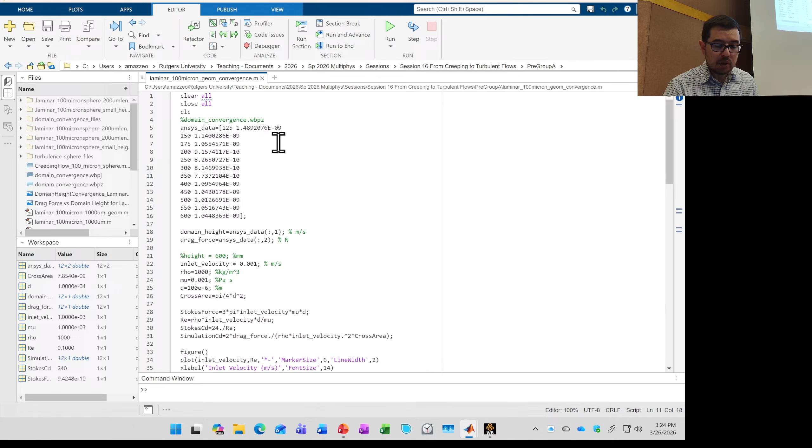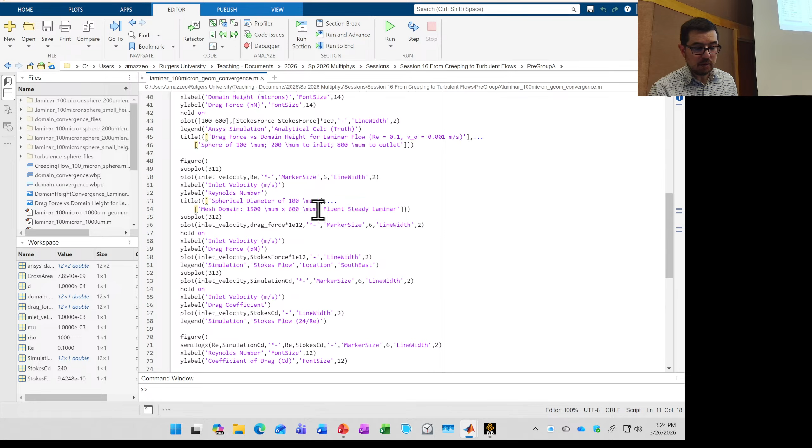Here's the MATLAB code. You can take a look at it, and it'll be recorded. That allows you to do this pretty easily. What you do is you take the results from your table of design points, you bring them into this Ansys_data array, and then you create these parameters for the domain height and the drag force, and you plot them, as you see here. And then this is maybe a little bit more complicated, nicer plot as well. And so this is going to be one of the things that you do.

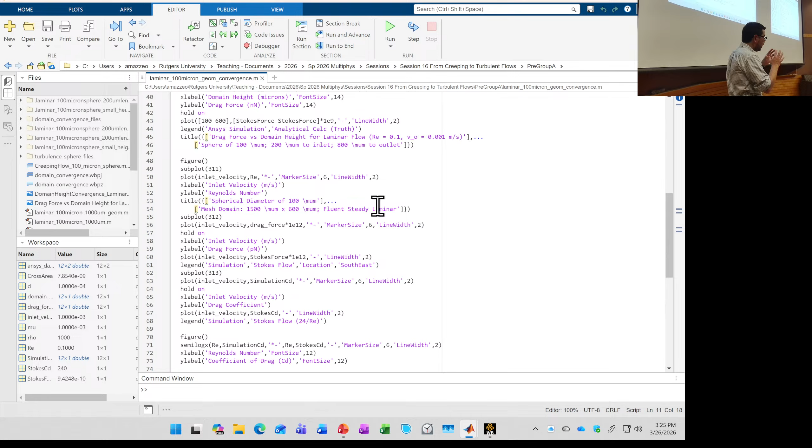You're also going to turn on the turbulence. You remember you go back into Ansys and you change the type of flow that you have. Right now we put it in laminar, but you're going to change it to turbulent. And you're also going to eventually change the size of that ball to something that's greater than 1 centimeter. So there are going to be a number of things that you run with. But with what we've gone through, you should have enough to kind of struggle and get through the assignment. Any questions?